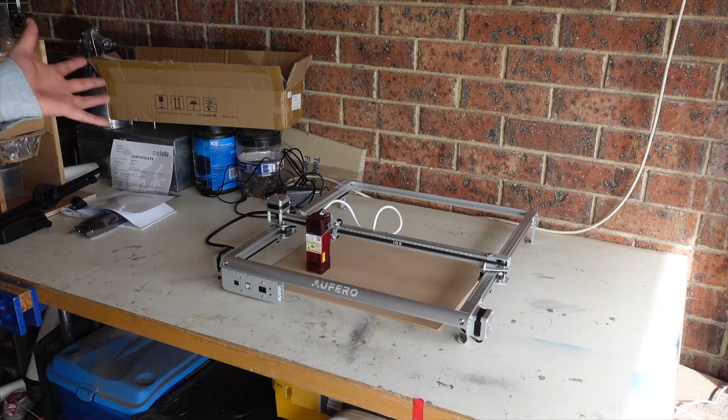So here I am with the Aufero Laser 2, this is a very basic entry-level laser. What we're going to do is set up the Atomstack Maker AC1 Lightburn camera to use with this laser. Now, this laser was never designed to be used with a camera, and we're going to go through each step, setting up for the very first time using the Atomstack user manual. So let's get to the first step and let's see what goes on. The very first thing I need to do is grab the camera, open it up.

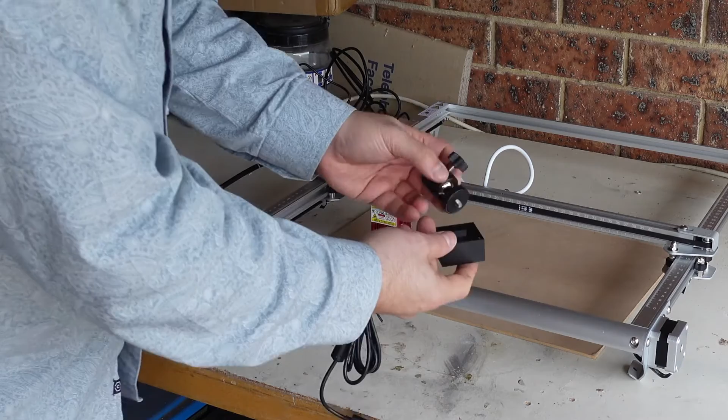As I was showing you guys before, there's a mount at the back here, which we saw when we were unpacking. So the very first thing I need to do is place this ball mount onto the camera. And now that we've got that done, we'll place it down on the lens.

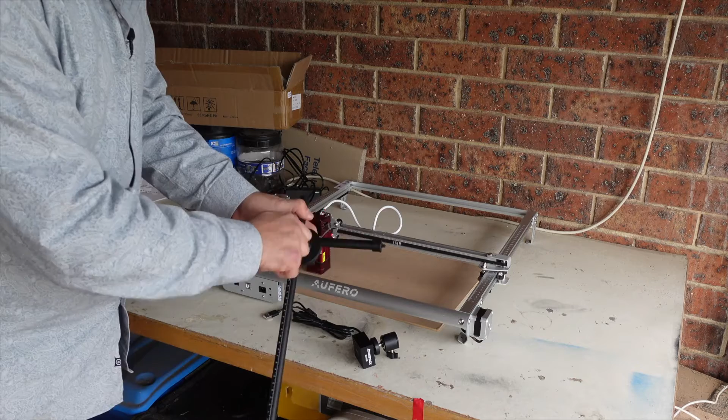The very next step we're going to do is use this extension piece. Let's lock it in here. According to the assembly steps, I actually need to also place the clamp on the table. Now we spoke about this before, but I love the fact that this clamp is so big.

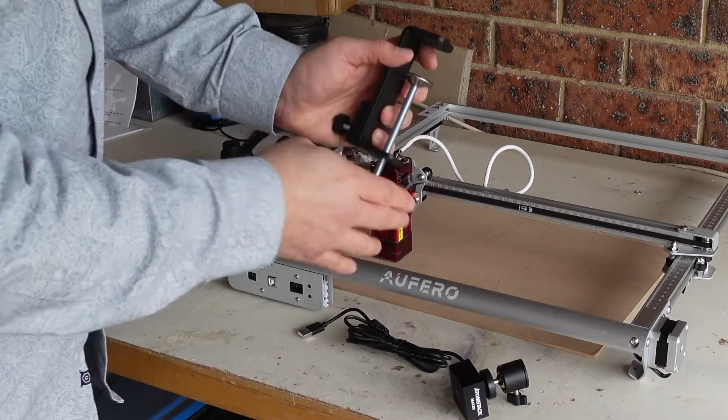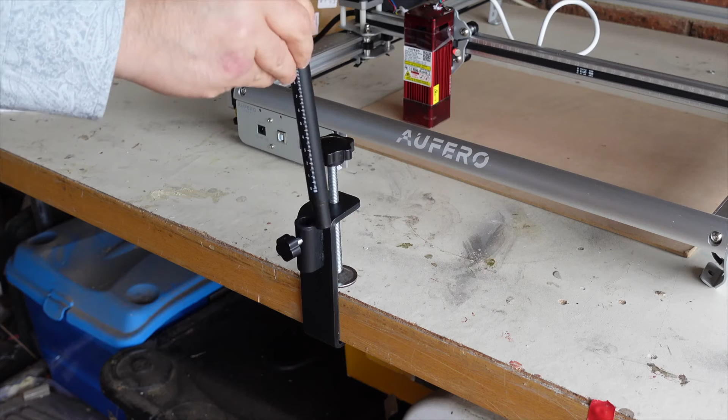I'm going to place that in the middle here and just tighten it up. That's nice and secure. We'll release the clamp and place this piece in, which has all these measurements, which is also very handy to have.

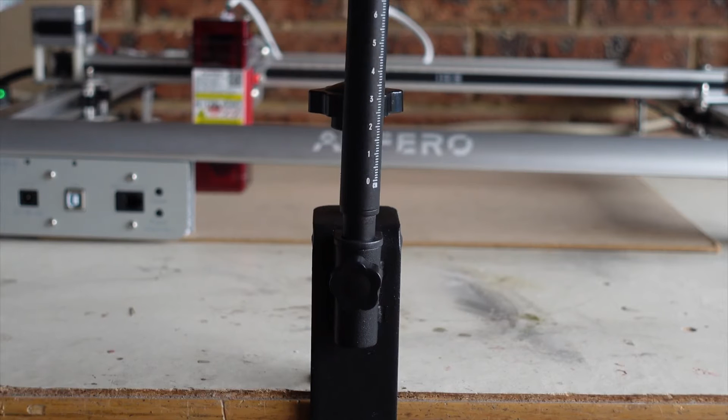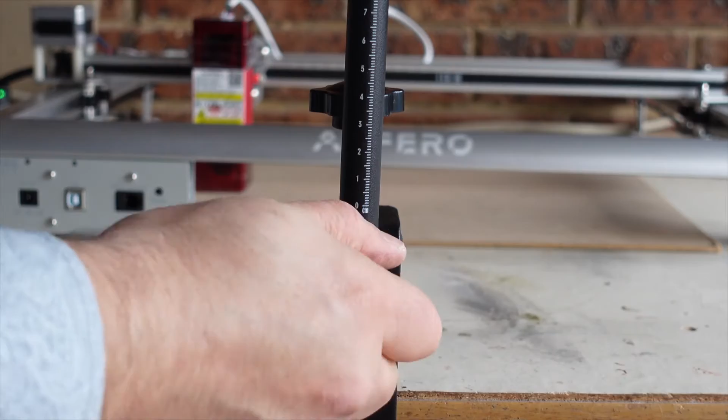It's a little tight. I'm just going to pull that screw right out and see what's going on here. Yep, that's sitting there nicely. I'm going to move it so that it's actually all the way so I can read the measurements. Lock that in. There's a screw right here that fits onto the ball mount there, so I'm going to just screw that on.

Got to use both hands. Just tighten that up. So you can see, literally I've done most of the work already. I'll raise it up nicely. Release the clamp, turn it around, take it to approximately the middle of my work area. I'll bring the laser a little bit closer.

The last thing I need to do is just point the camera down. Right at this point in time, you can see that it is off to the side. This little notch here will allow me to point it 90 degrees down. So I'm going to move that right in there, move it into place, and tighten it up.

That, for all intents and purposes, is all you really need to set this up in front of your cutting area. Of course, I will move the laser down a little further, and we will see how we can link this to Lightburn using the USB.

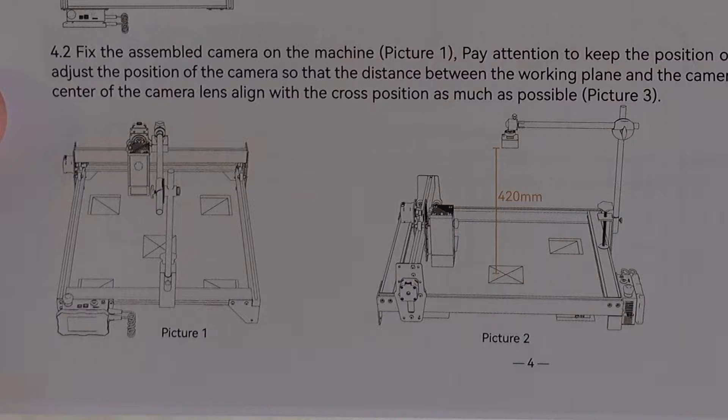As you can see here, I've actually set up the camera onto my work table, which is what I thought was the correct way to go ahead and set this up. I turned the next page in the manual and realized that the camera is supposed to actually go on the frame of the laser so they're attached should you have to move it around. Now, the only issue that I have with the laser that I'm using in this review is that it has this curved molding as part of the frame, and the clamp will actually slip off, will actually move. So for the rest of this tutorial, I'm going to leave it on the table.

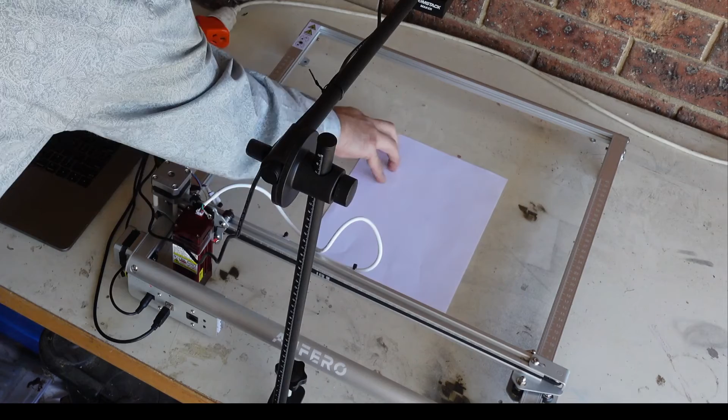Now that I've got everything set up, I'm going to actually run a bit of a test. I want to make sure that this is dialed in correctly. So what I'm going to do is take a piece of paper and place it in the cutting area. Let's smooth that down a little bit. And I'm going to hit update. You can see now that the camera's actually got an image on there, which is fantastic.

I'm just going to make sure that it's all in. It's a little bit high, so it's out of the cutting surface. So if I want to just readjust that, I'm going to just turn it over so the upper part is out of the cutting area. I can just move it and hit this update overlay, and you can see the piece of paper is there.

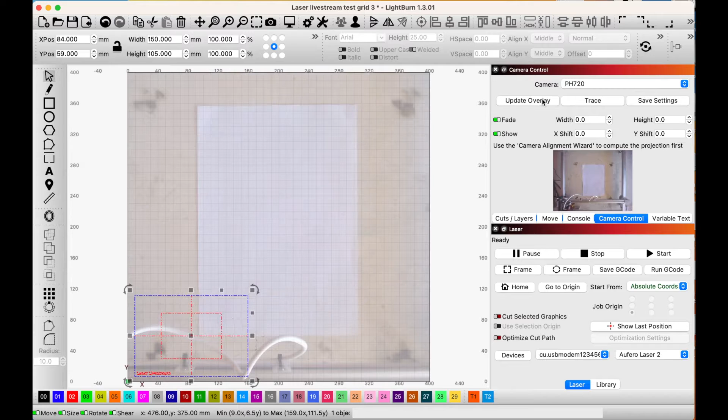One of the ways I check my camera orientation is by creating this little grid and placing it on a piece of paper, and I'm going to use these pieces in a short while. So I'm actually going to duplicate it. We'll grab a second one.

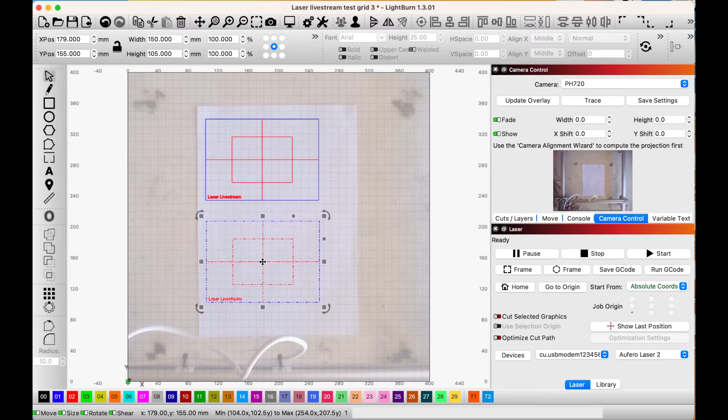For this, I'm just going to make two of them. I'm going to go into my cuts layer and check the settings are correct. In fact, I'm going to cheat this a little bit - I'll put this one right down low in the corner here, just eyeballing it, and move this one up high here. Then I'm going to watch what actually happens when I run the job.

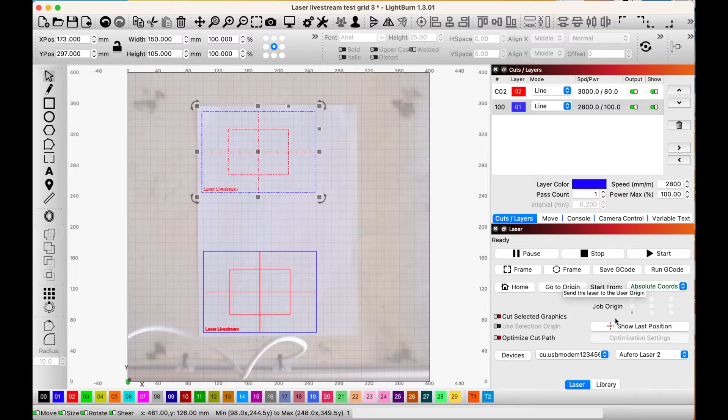Running the job now. Now I can see from the placement already that it's really tight, really close. You can see there's the camera overlooking the whole job.

Perfect placement, really - look at that piece, look at that corner, look at that corner in Lightburn. I think even without testing it, you can see how fast you can line up your jobs using this camera.

Now that everything's set up and working, I'm going to run a test calibration with a grid that I came up with. This is the grid right here - you can see it's just a box with a couple of lines. I'm going to place it in the work area, and then place some words to see how far off it is.

Usually my experience has been that with cameras, between 0 and 1 mil, you could have some sort of parallax because of the lens. Lightburn tries to take that into consideration, and there are ways you can fine tune it, but I'm not going to do that. I'm going to run these tests literally after setting it up for the very first time.

So let's go over to the laser and I'll show you what I'm going to do in Lightburn. I'm going to take this grid that I've made and place it in the middle here.

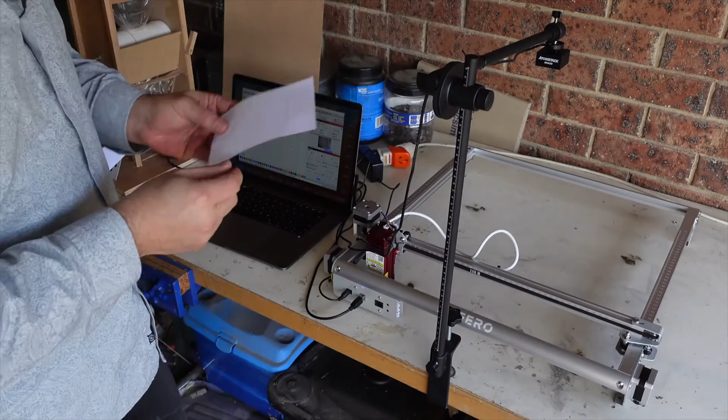I'm going to come back over to Lightburn, hit the update overlay, and you can see the piece of paper is there. I'm just going to smooth that down because you might want to tape it in place.

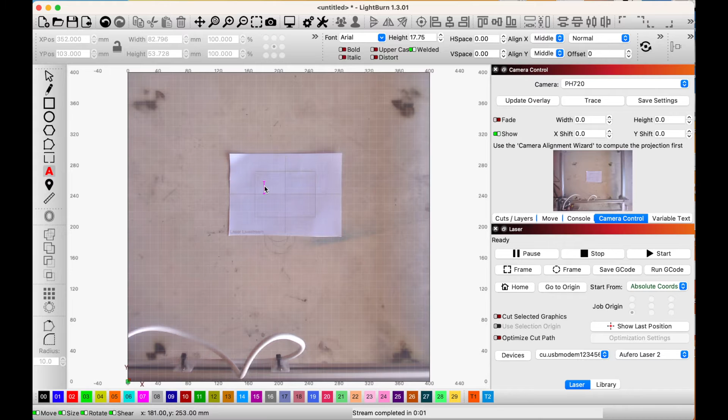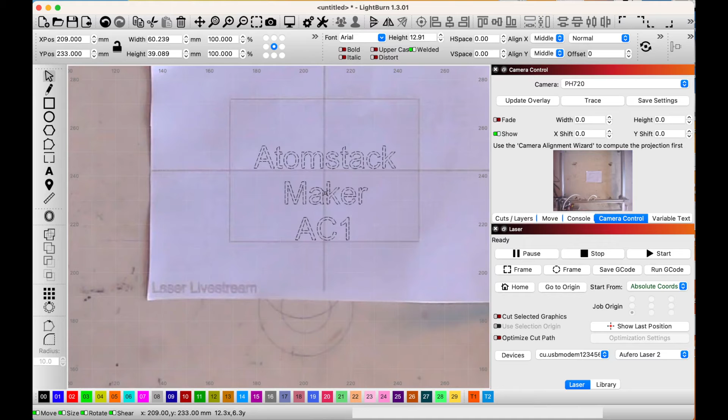What I'm going to do now is grab my text and type in 'Atomstack Maker AC1'. Select it, move it down - I'm actually going to make it a little bit smaller. When I zoom in, you're going to see exactly what I want to do here. I want to place that Atomstack word right in the middle, so right between the M and the S is my center line, and the rest of it dead on. We've got the AC1 right on that last line.

Looks good to me. Let's go back to full view - it's pretty much in the top half of the workspace. Go to my cuts layer, check it's on fill - I'm going to make that a line, and actually make it a little darker by maxing the power up to 80 so we can all see. And then I'm going to start the job.

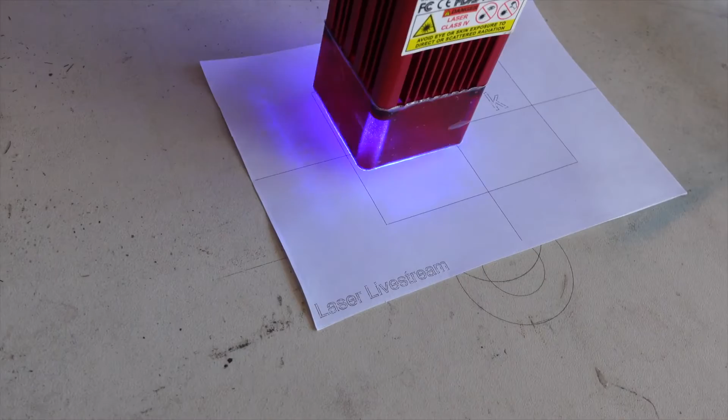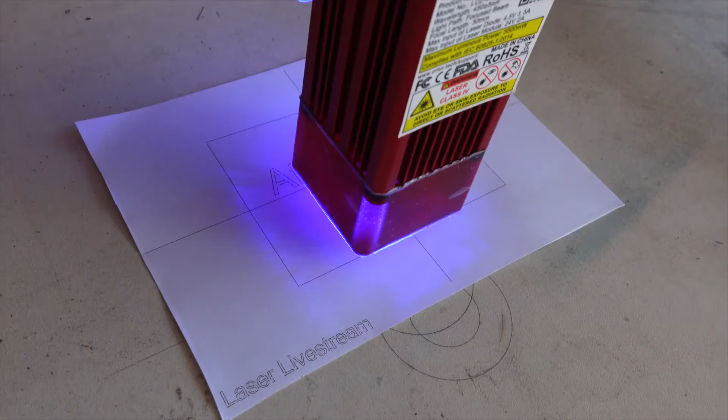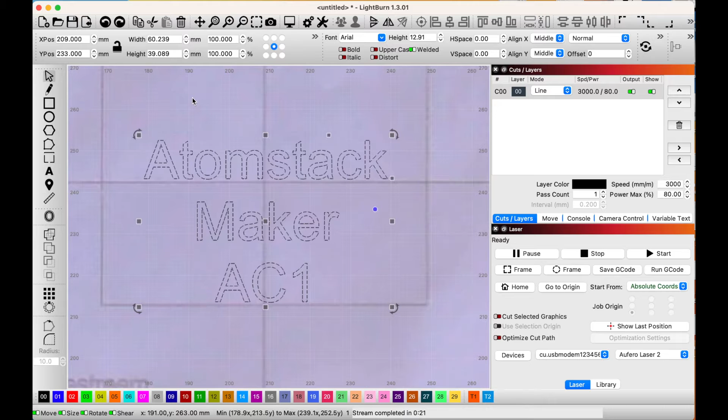And there you have it, the first test. You can see from the actual test that it's just above the line. The AC1 is where I thought it would be - there may be just probably 0.5 mil off. So in Lightburn, you can see that the line, it's like literally just, actually, that looks pretty good. Probably, yeah, I'd say definitely 0.5 mil.

So to me, that is a great result for the very first time that I set it up, went through all the instructions, all the setup, and got the result that I wanted. This is a really, really fast way to be able to go and set up a camera with a laser unit that has never been designed for it or doesn't have that capability. It's plugged straight into Lightburn and you're able to get results literally from the first time you set it up.

And there you have it, the Atomstack Maker AC1 Lightburn Camera - set up, getting us results.

The sun finally came out. It's just been gloomy all day here in the workshop. We're gonna head back to the studio and I'm gonna share with you my thoughts on this interesting camera.

Okay, so we're back in the studio and I wanted to share with you my thoughts on this Atomstack Maker AC1 Lightburn camera that has been really interesting to explore. I really want to thank Atomstack for sending this along. It's been really interesting to see another option when it comes to putting a camera to use in conjunction with a laser. I really liked a lot of things, so let's go through the list.

First on my list of positives with this Lightburn camera kit is that it's just easy to use. You do need some familiarity with Lightburn, but physically putting the kit together is very straightforward, and the instructions walk you through each step of the tutorial. If you're worried about getting the camera to talk to Lightburn to get the results we had here, don't worry about it. We have a step-by-step tutorial that I'm going to release very shortly, taking you from opening up that box, physically putting it together, and concentrating on the different steps within Lightburn on how to configure the camera and get a really good result.